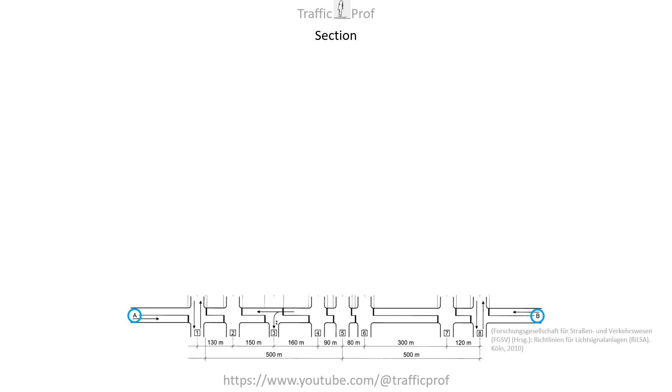Let's take a look at such a section. Here we see such a section from A to B from a bird's eye view in a survey map. We can also see the stop lines at the junction and crossings. In a technical language we say intersections.

And at the same time, this survey map is also part of a path time diagram. You know that from school. From left to right, a vehicle platoon goes along the path.

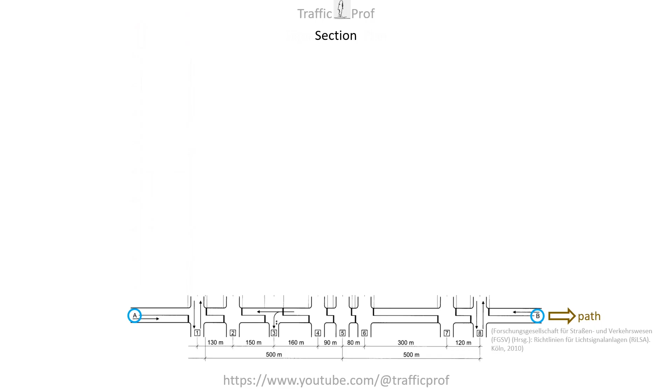Now let's take a look at what happens at the individual traffic signal system. A signal program is running, which a traffic engineer presents as a signal timing plan. The signal timing plan specifies the time sequence of the individual signals.

What are these signals? First of all, a green signal. It should appear until the vehicle platoon which has accumulated in front of the signal system has drained. As everyone knows, more signals appear on most signal systems. Of course, the red signal and the yellow signal and, which many people are not aware of, red and yellow.

Yellow and red and yellow are the transition signals. Then it usually starts all over again. The time of a single sequence of these signals is called the cycle time. Now let's simulate the journey of this vehicle platoon over the street section, or rather the path time diagram. At first, we are only interested in the green signals.

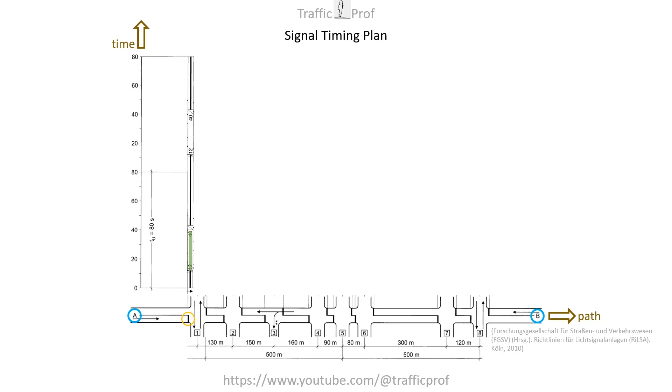At the first traffic signal system, the vehicle platoon receives green. Now it moves along the street section. You can show it in the path time diagram. And wherever the platoon reaches a signal system, it should be given green. This is what the driver wants, and we want to fulfill his wish.

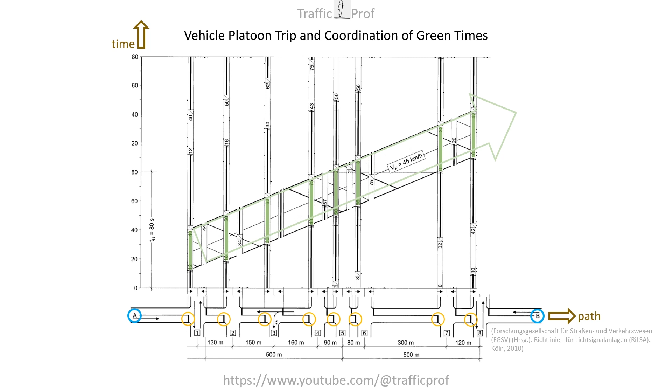By the way, a green wave should not only please the driver, but also the environment. In fact, that's the main reason why you realize something like this. Less braking and less acceleration means less noise, less exhaust emissions, and less fuel.

In our path time diagram, we now see how a vehicle platoon moves on the street section and that it gets green at every traffic signal system. We can also deduce the speed with which the platoon moves along the section, the so-called progression speed. The steeper the so-called green band appears or is created in the path time diagram, the slower the platoon moves. Usually we select a speed of 40 to 50 kilometers per hour.

We also recognize that each green time is part of a signal timing plan of the respective signal system, in which there are, of course, also red and transition signals and, of course, a cycle time. The cycle time must be the same at each installation. This is the only way to make sure that the green time in each round starts exactly when a vehicle platoon approaches the traffic signal system.

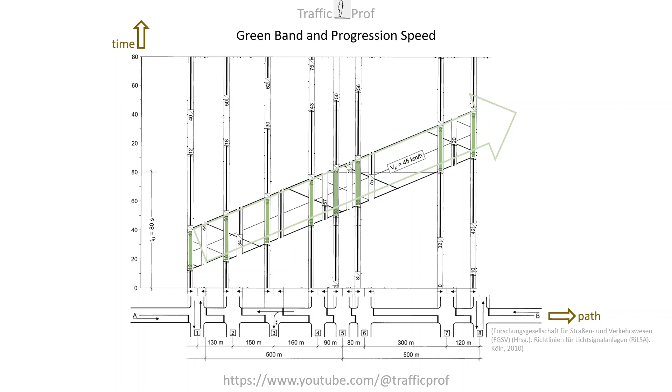So it is now a question of coordinating the green times in the opposite direction, from B to A. In our path time diagram, we see the stop lines in front of the traffic signal system in the opposite direction, and already suggestions for the corresponding signal timing plans.

Of course, these signal timing plans must all have the same cycle time in order to enable the signal timing of all installations to be coordinated in the opposite direction. We have seen that the green times of directional and counter-directional flows should take place approximately simultaneously.

So let the green signal light up at the first intersection of the opposite direction at the same time as in the previously considered direction, and that of course also a cycle earlier. We want to make things right for motorists and nature and coordinate the green times. Of course, this can be realized.

All you have to do is to run the vehicle platoon with the progression speed along the path time diagram from B to A. And every time the platoon reaches the next signal system, a green signal is provided in this corresponding signal program. Well, there you go then, you say. But it's the little things that cause big problems. Let's take a closer look at the result.

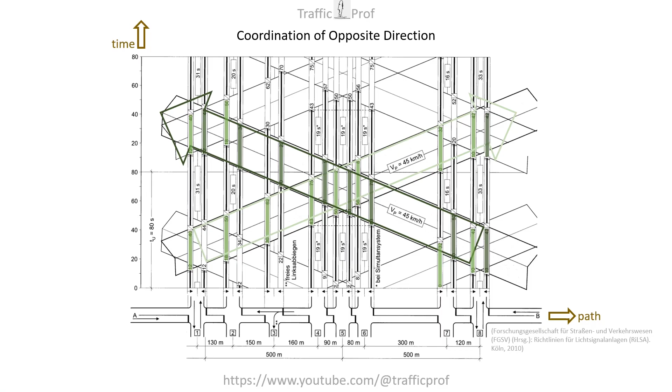Is it guaranteed that the green times of direction and opposite direction always take place at the same time, how it should be? This is the case at some intersections, at some so-so, and at one not at all. Is that a problem?

If green signal on the main street is done together in both directions, this is not a problem. There is still enough time left in the cycle during which the traffic on the main street is blocked and the traffic of the side street can drain. If the green times from the direction and the opposite direction of the main street are offset to each other, the time during which both directions are blocked at the same time is reduced.

At intersection number 4, for instance, it's only 19 seconds. Only in this short period of time, the traffic of the side street can flow. If during this time the traffic jammed at red in the side street can drain, it is all right. If not, there will be traffic congestion on the side street.

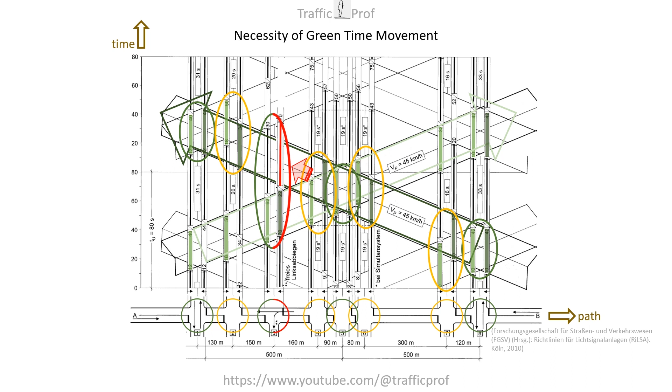And then the following happens. In one direction, the coordination is perfect. In the opposite direction, the vehicle platoon runs up to a red signal. But why is such a thing sometimes necessary? Why are green times sometimes offset from direction and opposite direction when a green band is inserted into the path time diagram? Let's take a look at that.

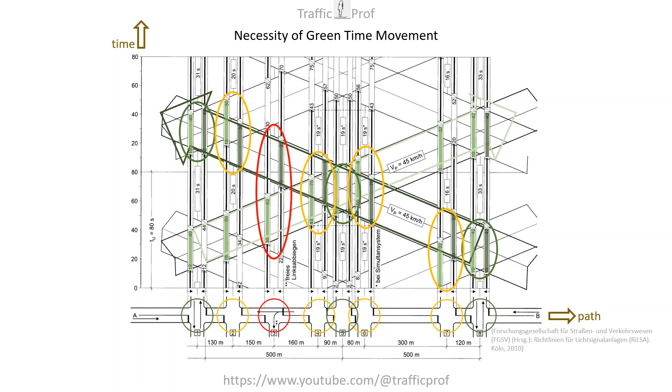What do we see? The points of intersection at which the green times of direction and opposite direction always take place at the same time always have the same so-called distance between green band points of intersection from each other. This distance depends on the slope of the green bands. It ultimately depends on the progression speed. You can calculate the distance and vary it depending on the progression speed, but however you choose the speed, there is always such a uniform distance between green band points of intersection.

Unfortunately, the junctions in our historically grown street networks do not have uniform distances. For instance, junction number 3. And unfortunately, sometimes at a junction on the section which is not a green band point of intersection, the green time has to be moved so that the direction and the opposite direction on the main street can be blocked at the same time, in order to be able to give a green signal to the side street so that this traffic can also drain. But that means an interruption of coordination on the main street, at least in one direction.

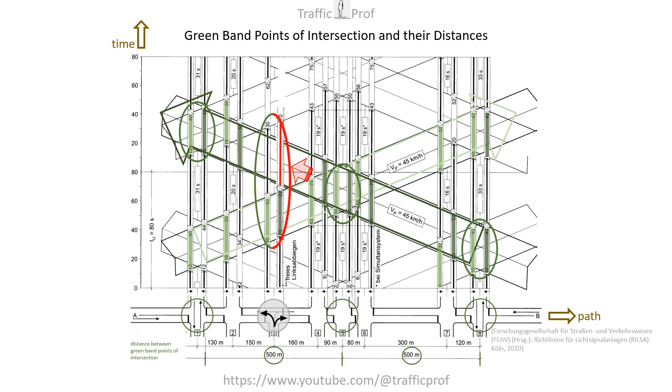I think it has now become clear why a green wave does not always work and the coordination is not always possible. In summary, the reason is that, for geometric reasons, equal intersection distances would be necessary to be able to give green to the vehicle platoon in the direction and in the opposite direction whenever it reaches the traffic signal system. But these are not present in reality.

Of course, there are ways to optimize the whole system by optimizing the sequence of the individual traffic signal systems or varying the progression speed. This makes it possible to create a coordination in such a way that there are as few breaks as possible, and that also enables cyclists and public transport to pass through without stopping.

This requires many iterations. You can also use apps that communicate with the system and tell the driver what speed must be selected to get green at the nearest intersection. Using such tools, green times can also be extended or shortened depending on traffic volume. Variation of the cycle time to a limited extent is also possible.